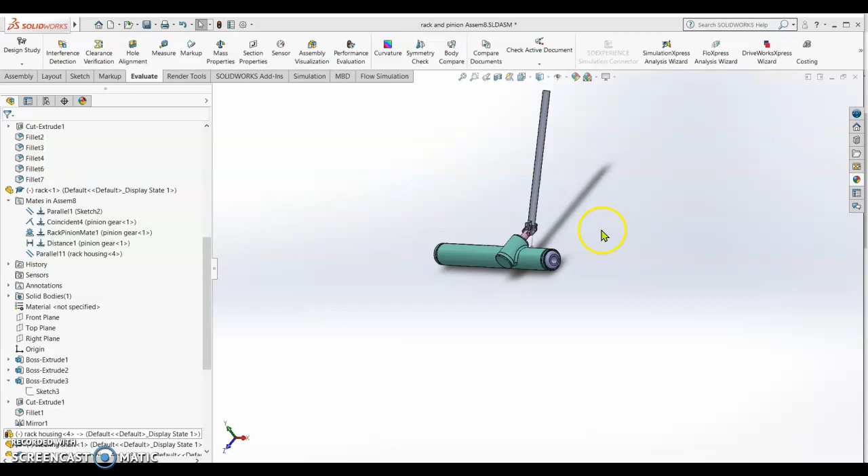Now we're going to design the rack end ball socket. Okay, so first we have to measure this hole. The diameter is 12 mm.

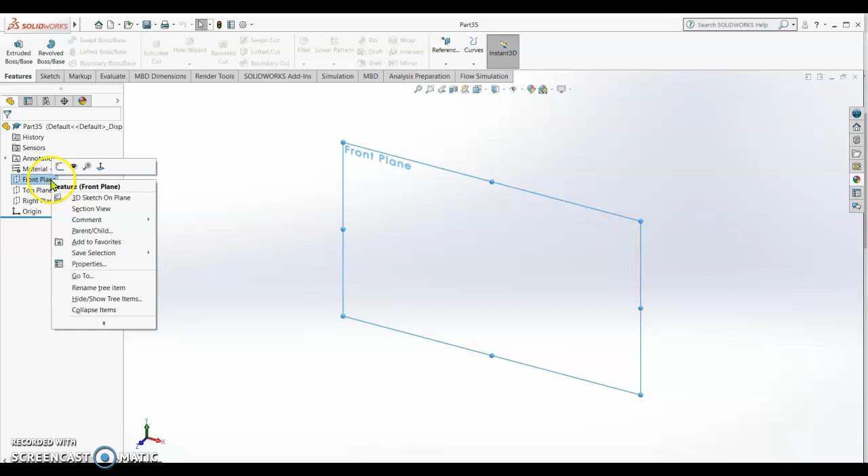So you can open your part. Sketch on front plane. We're going to make a circle. Smart dimension, it should be 12 mm.

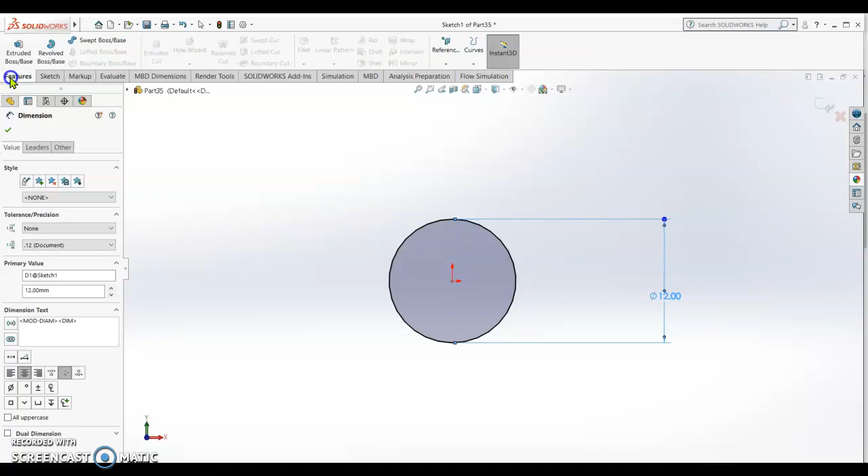And then we extrude, features extrude. So we extrude by 25. Okay, we reverse, check.

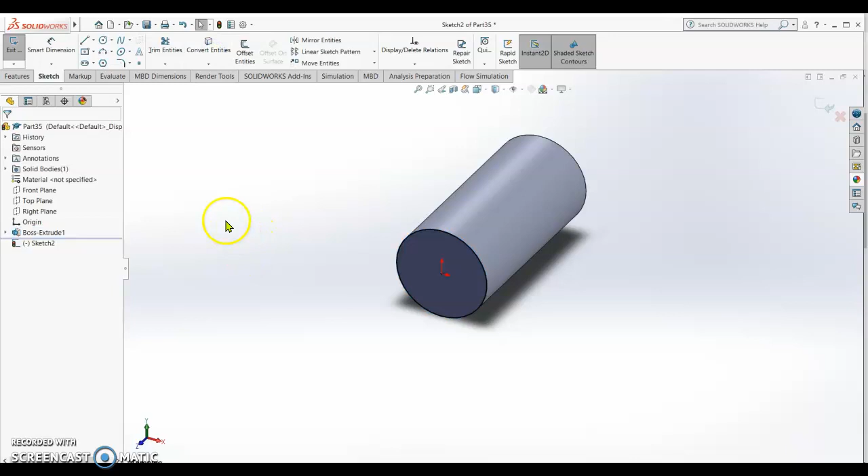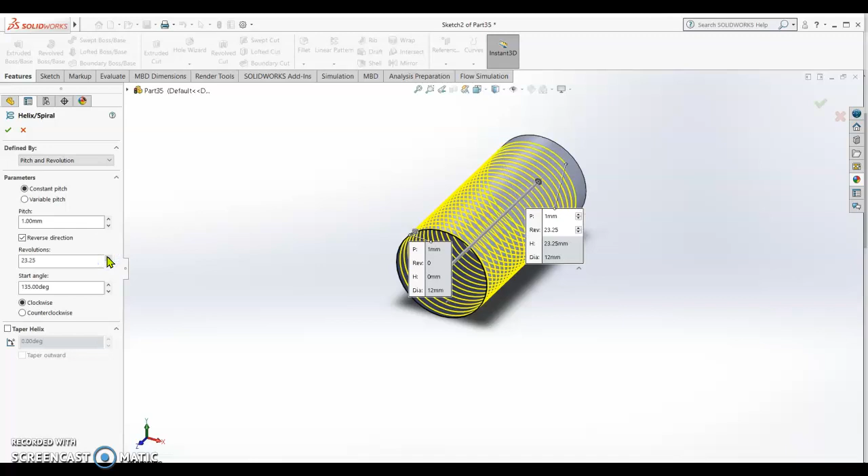We sketch on this space, sketch, convert entity, and then go to features and use helix. On helix, we're going to use a pitch of 1 millimeter. We continue the rotation. Check.

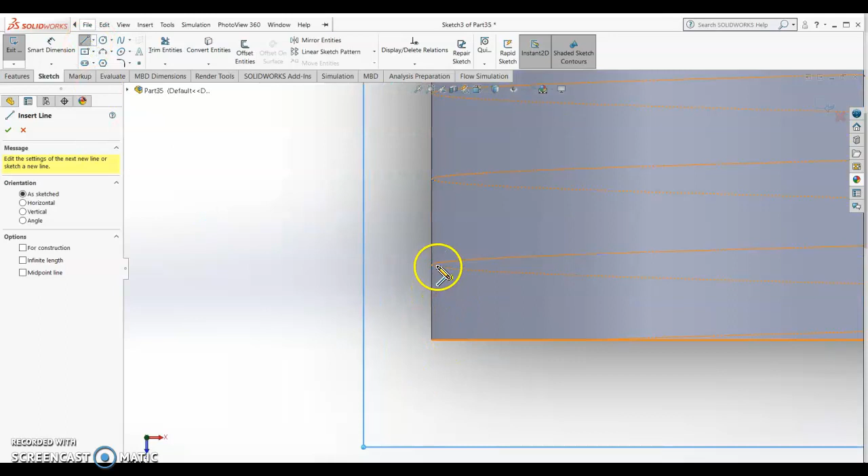Now on the top plane, we're going to sketch the shape of the thread, normal 2. Sketch. We draw a line, making sure that it touches the spline. Sketch.

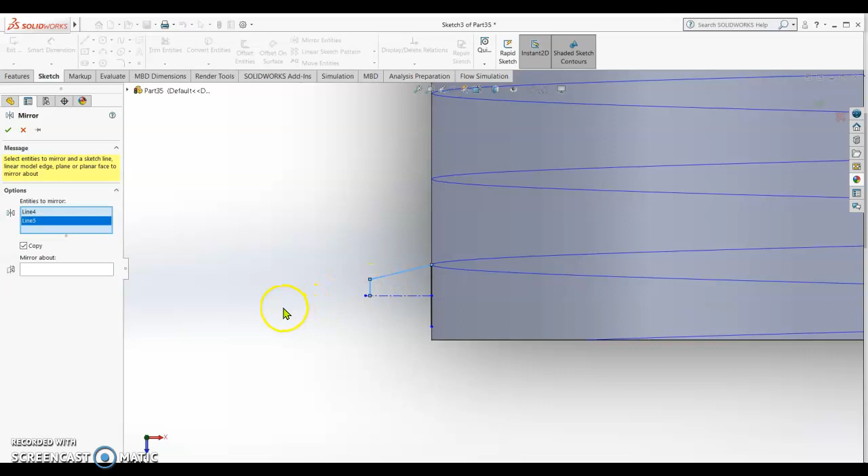Then we make a center line, and then we make the profile of the thread. We mirror this line and this line, mirror about this line. Check, make sure that all are closed.

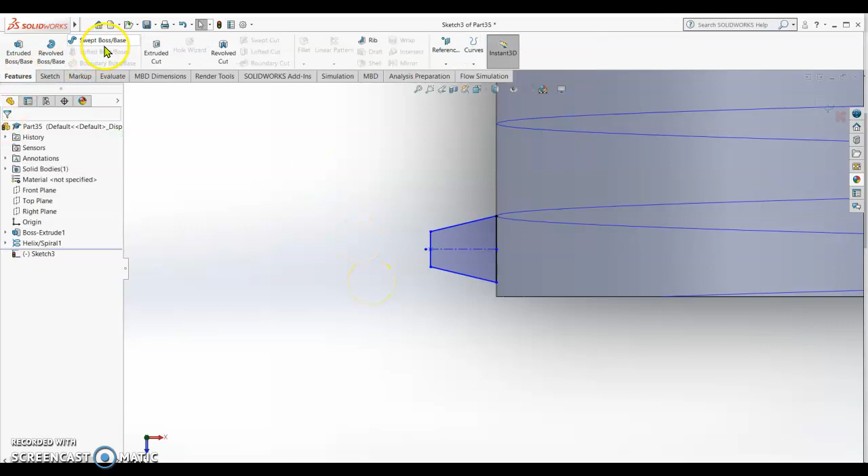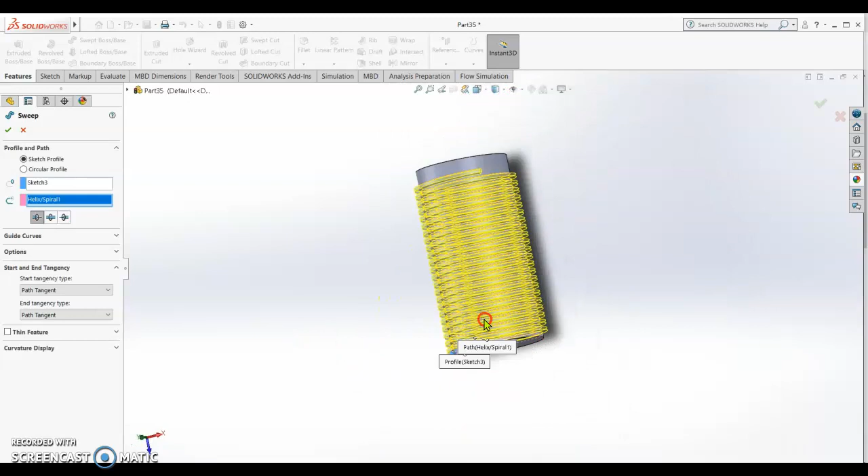Now we can go to features and make the sweep boss, using this sketch and this profile. We check if it is okay. Now it is okay, but the thread tip is too thick, so just click check.

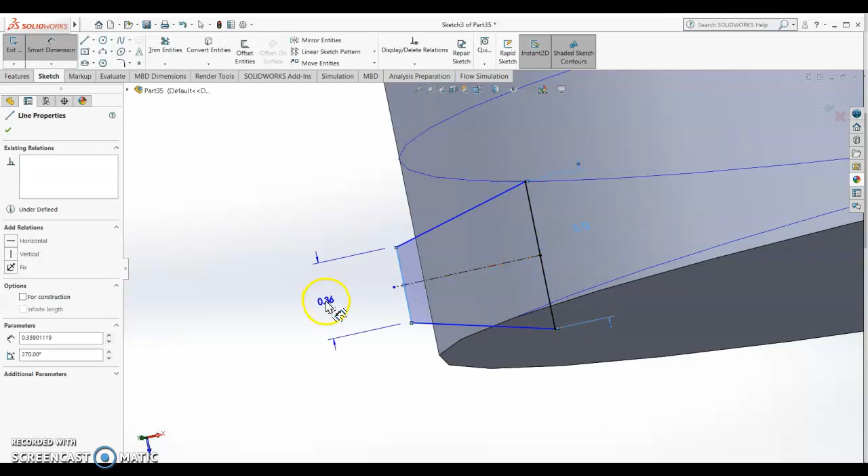We go edit the sketch and put dimensions. Smart dimension, this line, we make it 5. 7.7, enter. We make this one smaller, so 0.2. And this and this one, we make it 0.5. Check, and then close the sketch.

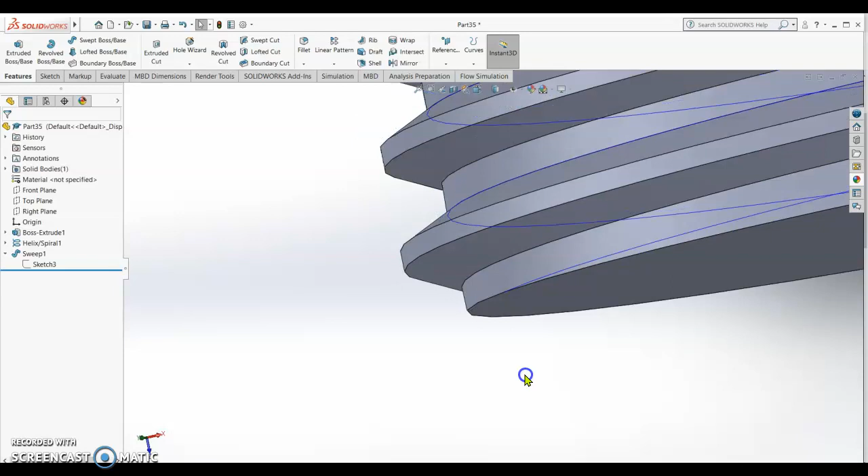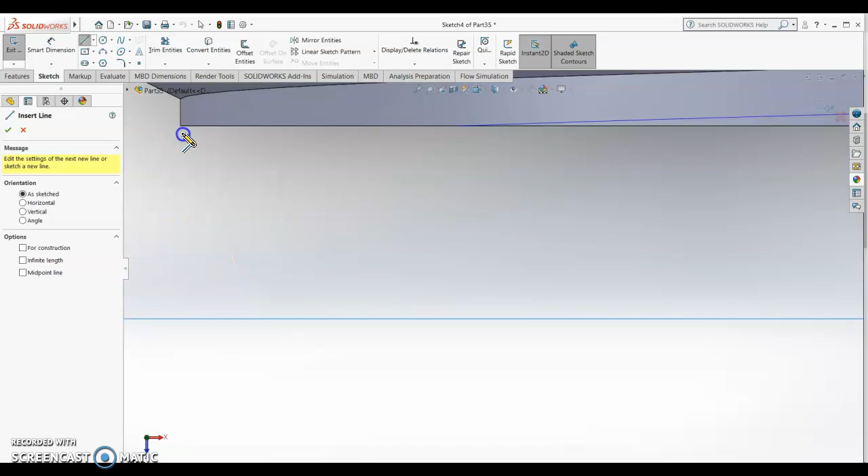So this is now our thread. We can cut this edge, we can chamfer it. Same thing, sketch on top plane, normal to, sketch. We follow the profile of the thread, the angle to cut. So we cut.

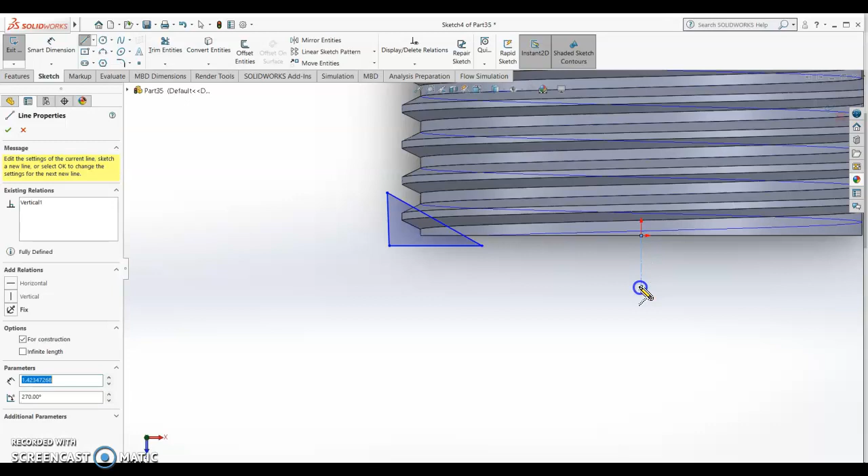We make one triangle sketch, making sure it is closed. Then we draw a center line, and make a revolve cut. So revolve cut, check. Alright, so this is now our thread.

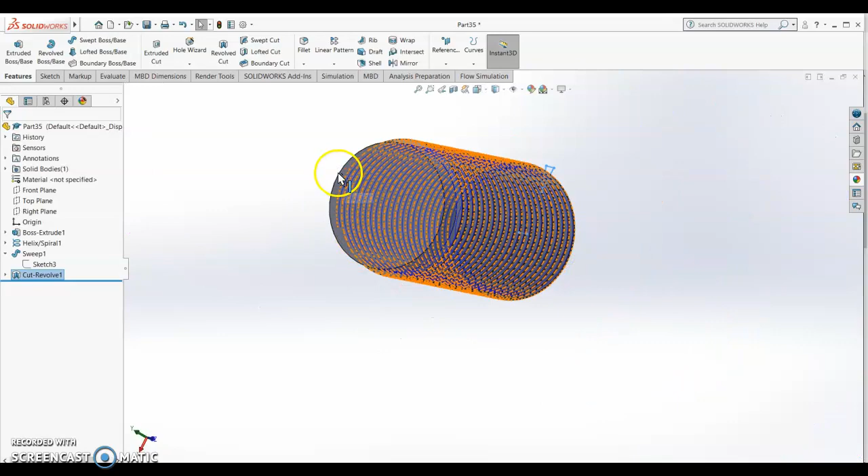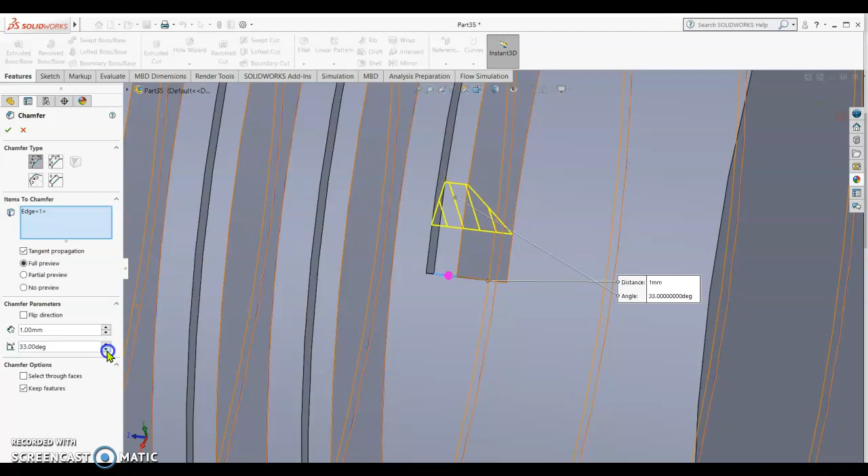On the other end of the thread, we can chamfer this edge, chamfer. We can increase it. Check. So the thread is done.

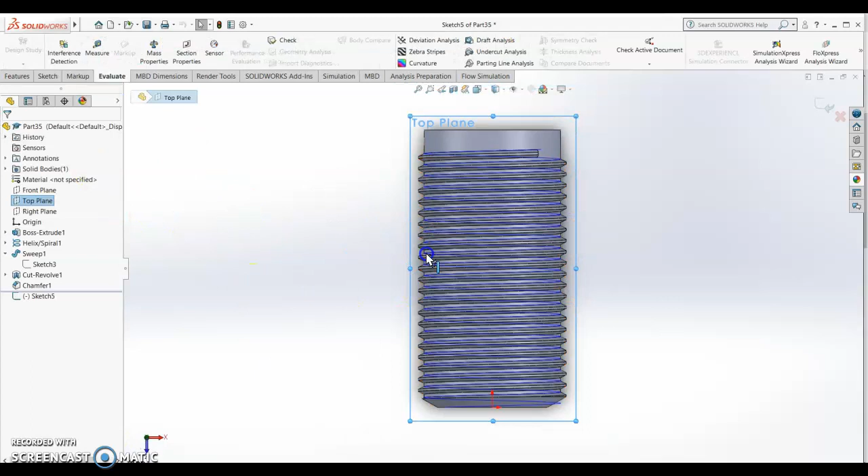Now we're going to make the housing of the ball socket. We go on top plane, sketch, normal to. We draw, using this center rectangle. Alright, let's put dimension.

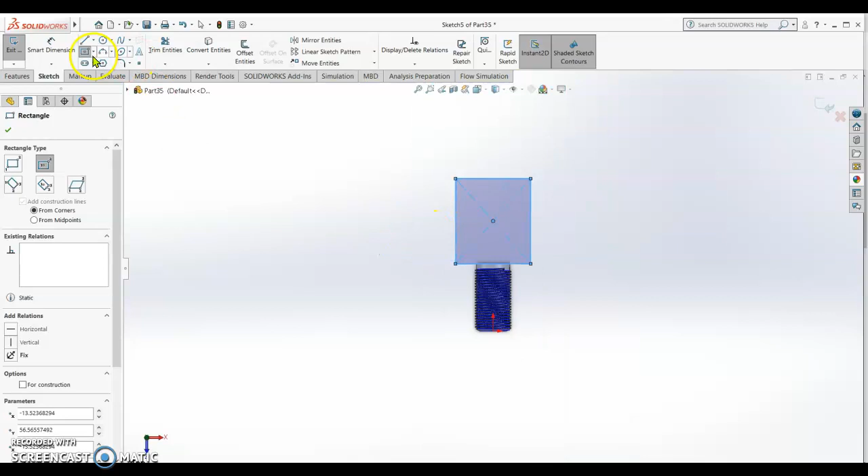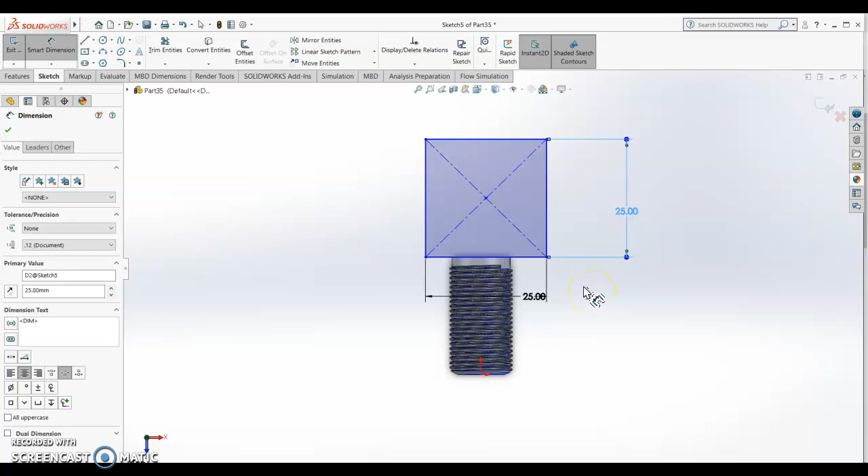So dimension, let's say this 25. Okay, so this one also 25. So it's 25 by 25, and then I want this middle, escape, escape, escape. I want this middle to be exactly on, should be on vertical line.

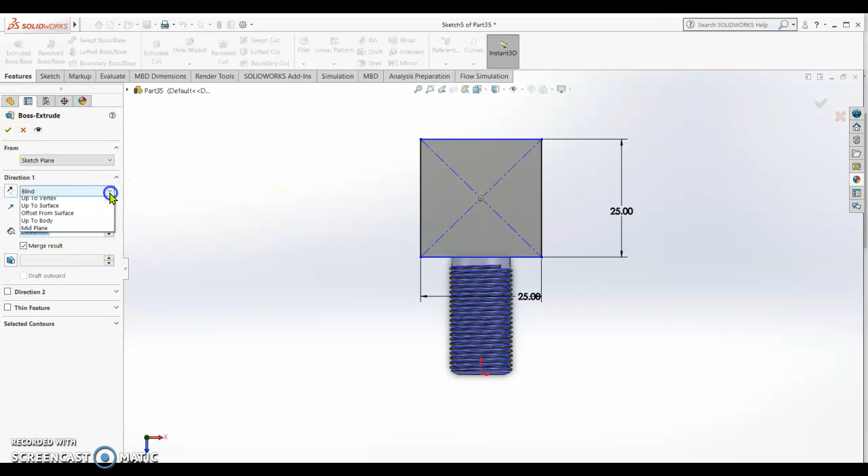So now we can extrude, features, extrude. We make it a cube, so therefore should be also 25, and we use mid plane. Check.

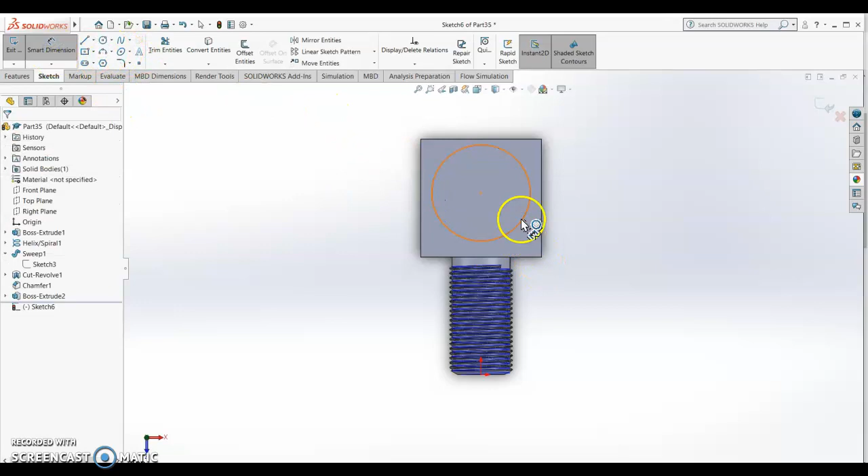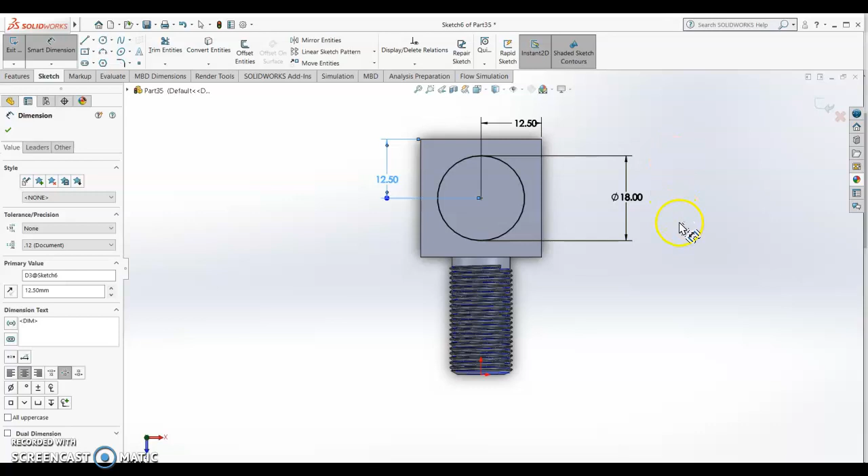On the same top plane we sketch a circle. We find the center. Smart dimension, we want this one to be 20 or 18 mm, and then I want this one to be exactly 12.5. Enter. And then I want also this one to be exactly here, 12.5. So I put it exactly on the middle and close the sketch.

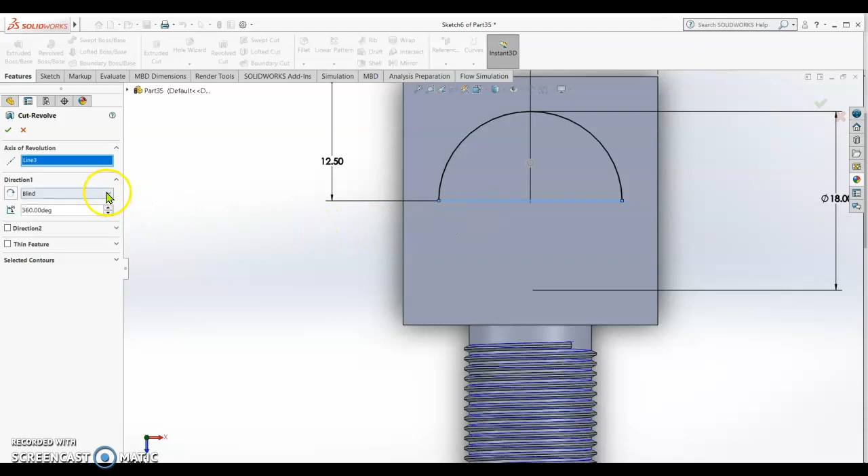We made it, we make a half. Alright, and then we trim one side, and then features we use revolve cut. So we use this one to cut. Alright, so it's already cut inside.

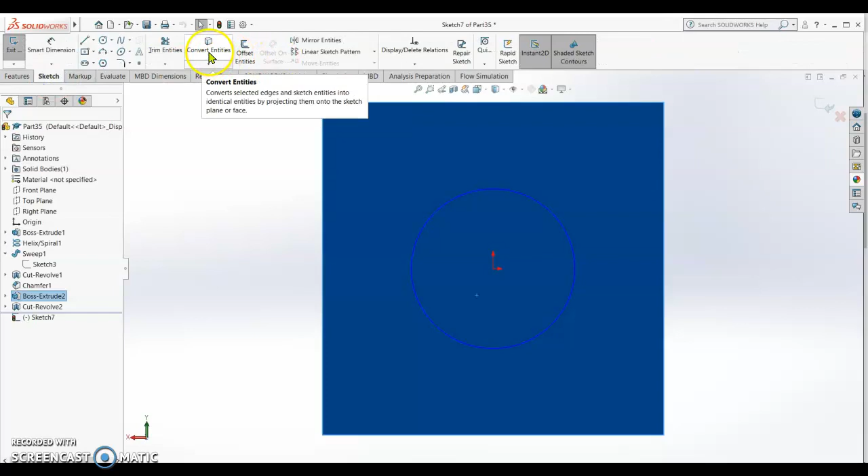So from this point we sketch normal to. We convert entity, sketch, convert entity, select this one, 7. So click and then convert.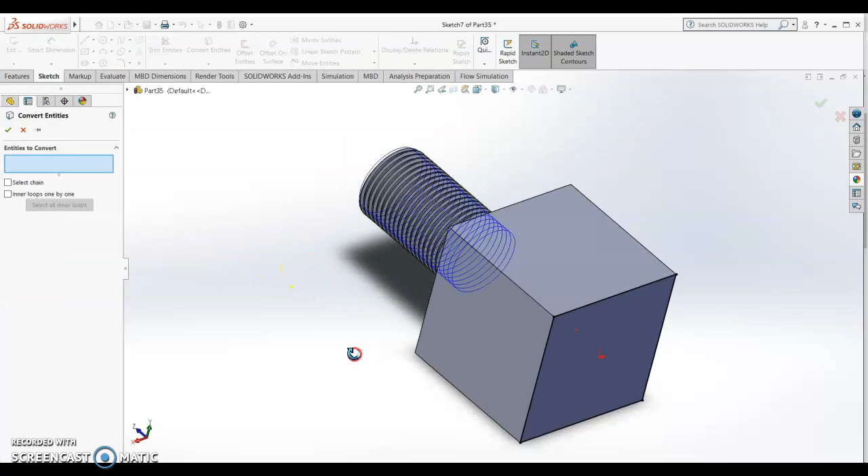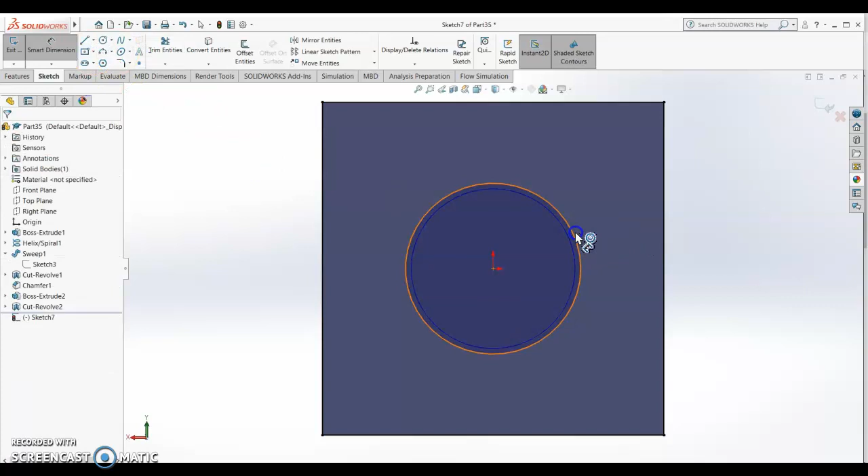So it doesn't want, so therefore normal to. We can sketch close, sketch circle. We put the dimension of 12 on there, and then features extrude cut.

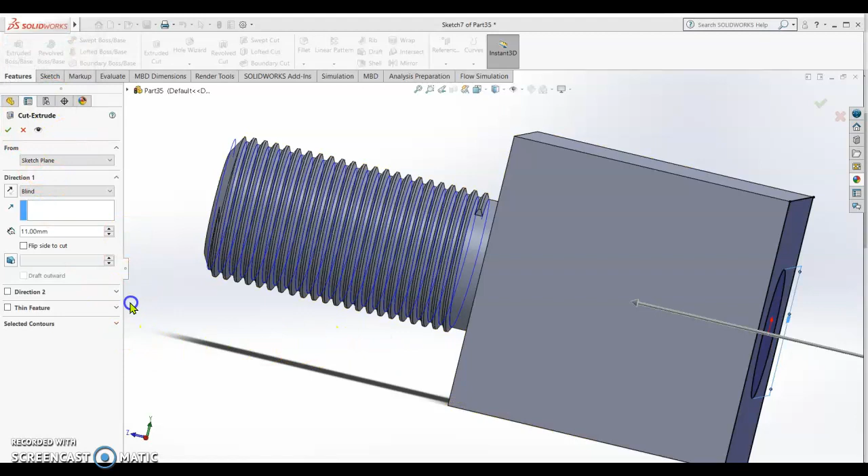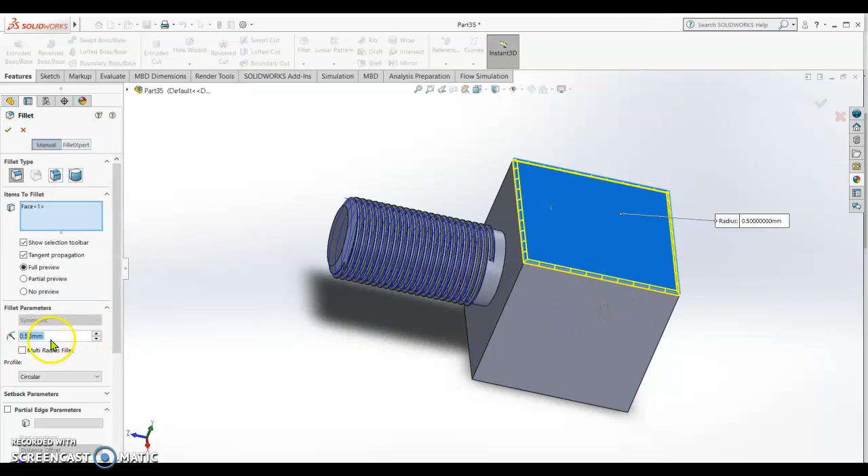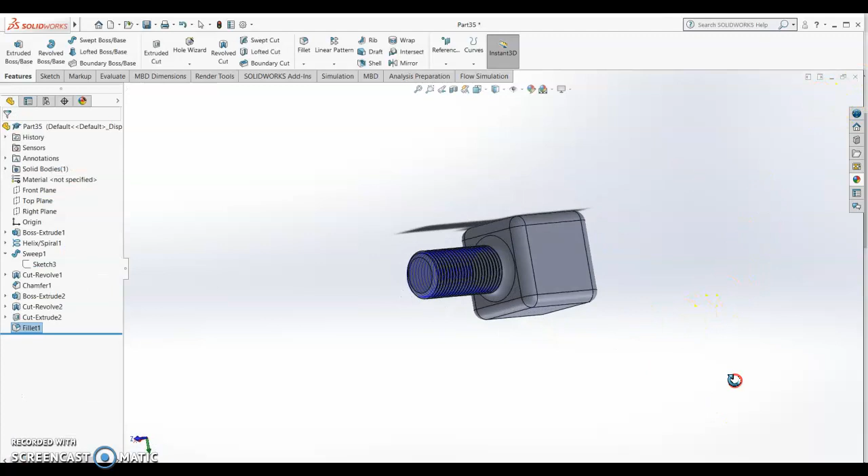Alright, we can now make this face round by 0.5, enter, this side, this side, this side, this side, and also this side. Okay, so this is now our rack end.